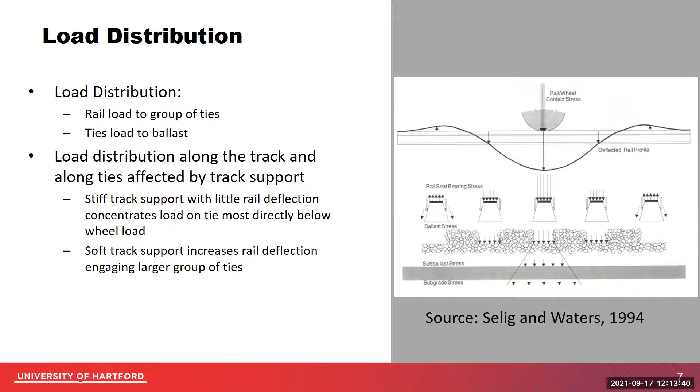Talking a little bit about how those stresses get distributed - the load distribution of the track is shown in these figures here, where we compare wood and concrete ties to each other to show how load is distributed. How the load is distributed, depending on track conditions and model parameters and such, can vary greatly.

In this comparison with a track that has an 18-inch thick ballast, 60 KSI ballast modulus, and a relatively stiff subgrade at 8 KSI, the load on the central tie is reduced with a concrete tie, and the pressure is almost the same on the subgrade. So we can look at the bulb on the bottom - we can see that 10 PSI stress contour applying to the subgrade, regardless of the surface interactions near the ballast and at the rail-tie interface, the load gets distributed down through the ballast into the subgrade at nearly the same level.

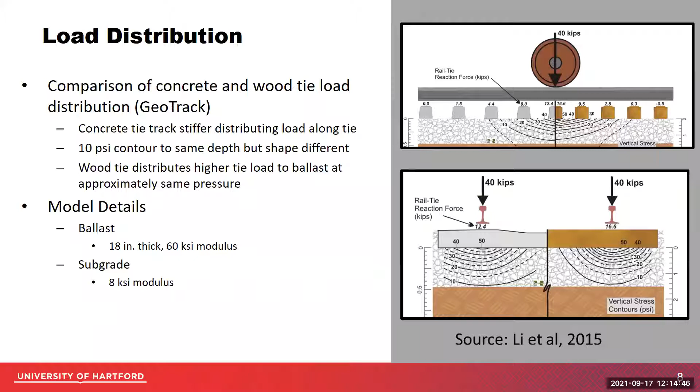The track design philosophy basically is to develop a track cross-section of ballast, subballast, and subgrade to distribute applied loads to the subgrade at an acceptable level, protect the layer below, and provide resilient support to the tie.

Protecting the layer below means that the ballast should reduce the stress in the ballast to an acceptable level for the subballast. The subballast reduces the stress to an acceptable level for the subgrade while maintaining their position and not intermixing, pumping, or otherwise deforming. That last component is known as limiting plastic deformation and settlement.

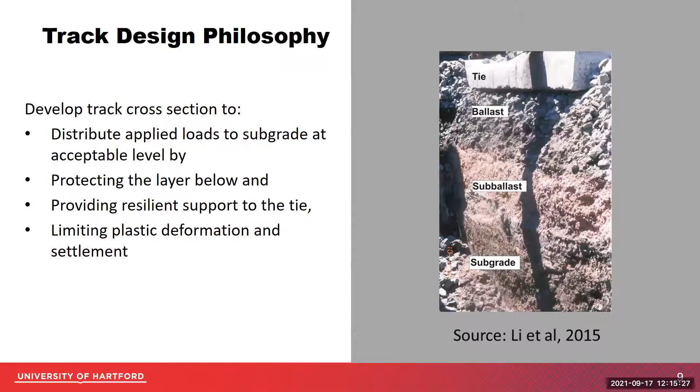The two ballast design criteria we're going to talk about in the design method today are excessive plastic strain at the subgrade surface, that's the subgrade squeeze in the top figure, and excessive plastic deformation, ballast pockets in the bottom figure.

These two subgrade failure modes were the two most common and became a topic for me as an undergraduate at the University of Massachusetts, where I had a chance to work with Dingqing Li in the development of this method and model, and in GeoTrack the stresses that occur near the onset of these two failures, and develop the design charts that we'll talk about in just a few minutes.

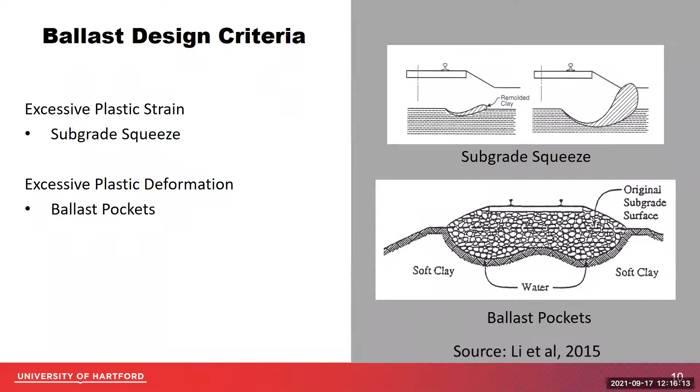The design method itself handles a trade-off between the ballast thickness required for certain subgrade properties at a site or cross section, including trade-offs on track life, number of cycles, and design wheel load.

The design considers the allowable subgrade deformation, and here is really a big jump, that subgrade deforms. In good track, we should have a resilient subgrade that doesn't deform, but the reality is in very soft subgrade conditions, deformation is sometimes inevitable with any load, and the design method in those particularly soft subgrade conditions requires a specification of an allowable amount of deformation that is chosen by the designer.

The subgrade soil type, subgrade and ballast modulus or stiffness, subgrade strength, and other numbers in the chart are the thickness, subgrade thickness, and a design constant of 6 inches for L. So our T over L there gives us thickness increments in 6 inches.

The equation for this design method is given here at the top. The other parameters besides the allowable deformation, the design wheel load, the subgrade strength, and number of load cycles, are these parameters A, B, and M, which are soil type parameters that describe the behavior of the soil. And there's a factor of 1,000 square inches to keep the units in check.

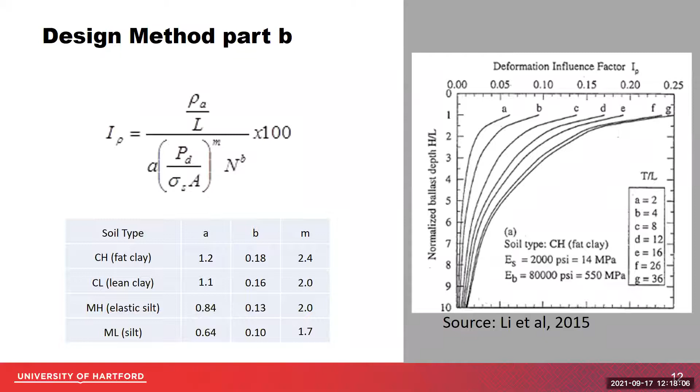Moving on to the risks affecting the track substructure. Maybe not the most problematic, but certainly one of the first ones that'll come to mind is overload.

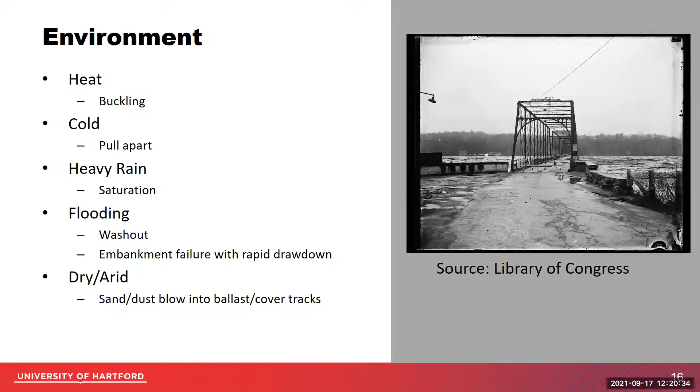Environment's another risk. Going to sound a little bit like a farmer here, but we have risks related to heat in terms of track buckling, cold in terms of pull aparts, rain in terms of saturation, flooding in terms of washouts and embankment problems, and dry arid conditions with sand and dust blowing into the tracks. So operating a railroad has a risk for every type of condition.

I'm going to call out drainage just for a minute, because when I watched the Hay lecture by Gary Wolf, this really struck a chord. One of his top 12 methods for reducing accidents is improving drainage.

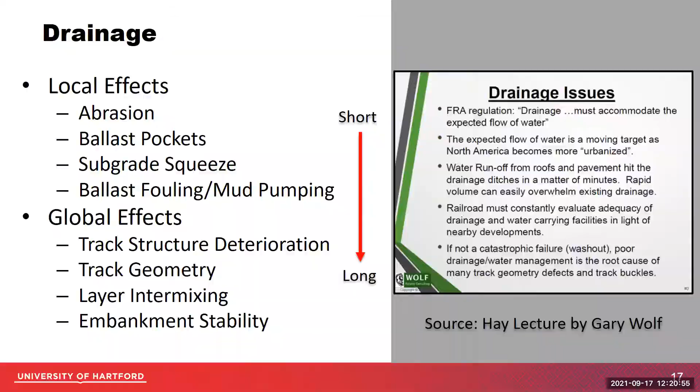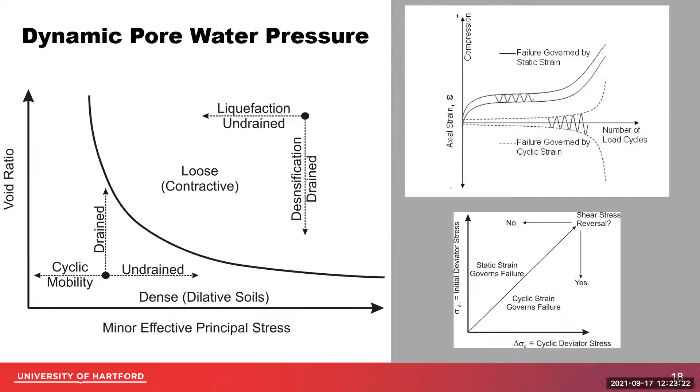When does shear stress reversal occur? It occurs under principal stress rotation. Each time a wheel passes, the stress state in the supporting layers changes, and the shear stress reversal shown in column B reverses each pass, on an incremental basis.

We have to make sure that the roadbed is installed in a condition that the static stresses in the roadbed are adequate to overcome these incremental shear stress changes, such that the overall shear stress does not reverse direction. If it does, you have problems related to dynamic pore water pressure development, since this is a major factor in how fast that develops, and this will certainly affect track life predictions.

So what are the changing environments? I think the first one is environmental changes. We're in an era where we have flooding that occurs a little more routinely than we're used to. And maybe what we're used to might not be whatever is, quote, normal. But if we think back to the floods of the 30s and the 50s, at least in my area in the Northeast United States, it's not flooding that hasn't been seen before, but it's occurring much more frequently. So severe precipitation presents local risks.

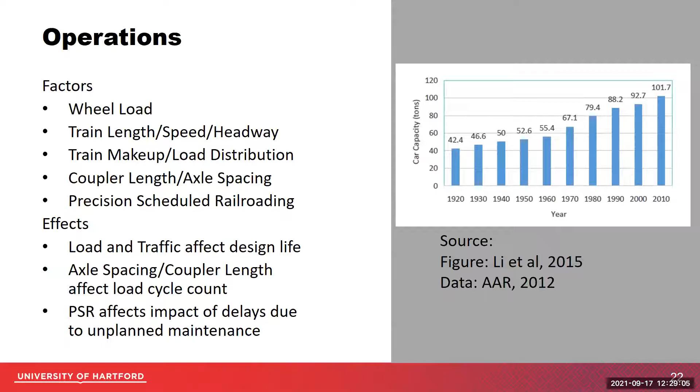In the future, we might have some benefit from the Internet of Things, although I have my doubts about the battery life and sensor life of a lot of these sensors relative to track life. We have some track out there that exceeds the life of most sensors that would be considered an Internet of Things type of device by multiple times.

And coupling with that, fourth industrial revolution, railroading 4.0, having better detection, monitoring, and knowledge of the lifespan of the track and its components would be helpful. But again, going back to the Internet of Things challenges, it presents some issues. And there are other options. Having a sensor isn't the only way to understand the condition. There are remote sensing techniques and other methodologies out there to empower and inform railroading 4.0.

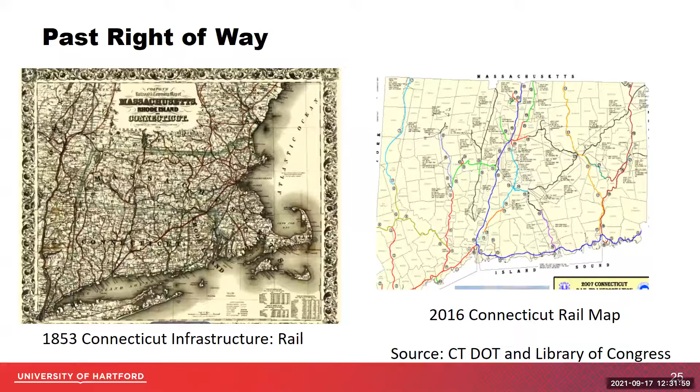So what's going to be the future of the right of way? In the 1850s we had canals, trains, and trolleys. Are we going to zoom from that to the Hyperloop? I don't know. In the 1950s we had trains and automobiles and trucks. And in 2050, a lot of people are saying it's going to be driverless autos and Hyperloop. I'm not sure how that is going to help us as a railroad develop a future. But if we look at trains in the 1850s and 1950s, I have a hard time thinking that trains won't be there in the 2050s.

And maybe our vision for future right-of-way is that ideal track structure: predictable rail freight transit, predictable degradation rates, ideal track. So with that, moving to opportunities to apply the design philosophy to create that ideal track.

Number one opportunity is to address risks. These risks include hazards that are natural or environmental, related to drainage, erosion, floodplain performance, local geohazards, subgrade, ballast performance, and global geohazards like slope instabilities and landslides.

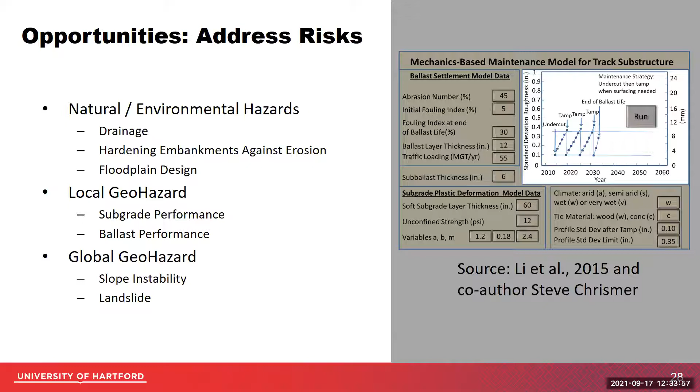So a common question we get asked is, how much more damage will some operation have over some other operation, whether it's a maintenance operation or a change in operating conditions, or flood saturating subgrade—how much more damage will be done? And usually when we get into these types of things, the answer comes from some ratio of load increase to the fourth power. And that doesn't really have any local knowledge, doesn't have any specifics about traffic, wheel load, or track maintenance to inform it.

Applying these design scenarios not only during the design stage to set a design life, but also if we have to go back in for maintenance, to set an expectation of the performance of the track after maintenance, would be a big benefit to try to reduce the slope of that cost curve.

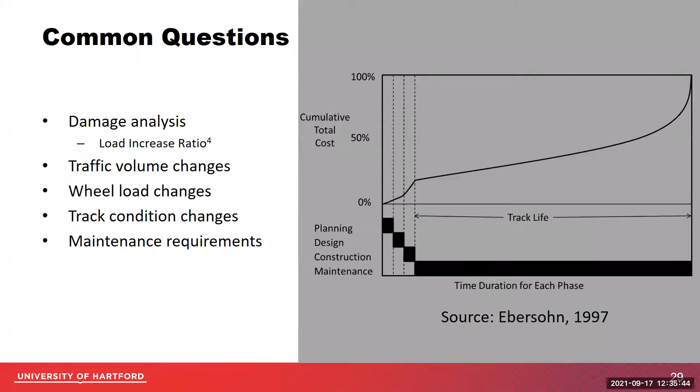Thinking about that, our roadbed design method provides ballast requirements for subgrade condition based on traffic volume and design load. That's great, we can design the ballast thickness. But if we want to convert that design into a design life and a degradation forecast that serves as a basis for design validation, we could be asking much better questions about the performance of our track.

So if we design that upper track and it starts to form this pocket that traps water, does the track deteriorate faster than design? It's deteriorating - if you don't have the degradation forecast, then it's always deteriorating faster than you'd like, because there's only so much time we have to fix things. But is it deteriorating faster than we thought when we made the design? That's a key question.

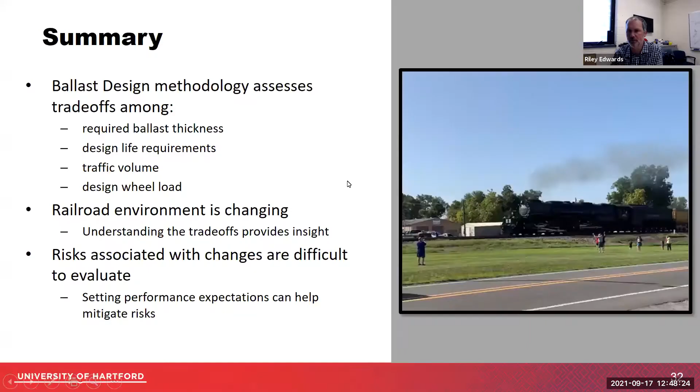Thanks, Ted. We have a couple of questions that relate to using the methodology in more extreme environments. I think I saw a question earlier about permafrost locations, and I see a question here from Mohammed related to peat subgrades. Can you comment on the use of the methodology you presented in unique applications such as those?

So permafrost, that's sort of beyond where I feel comfortable with my experience commenting on. The closest I've come to permafrost has been in southern Alaska, and that was really cold. But in those locations, the permafrost was not permanent anymore, so that was part of the problem. That's a tough one. If you want to design ballast for permafrost, again, it's evaluating the stability of the permafrost. It comes down to those basics: how stiff, how strong, and then limiting those parameters. But you have specific failure modes in permafrost that you should consider. So I defer on the rest of that answer to somebody else who knows more about permafrost.

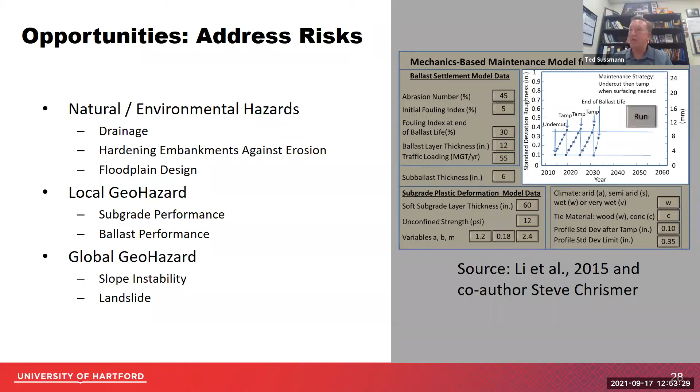It is what it is, we have to deal with it. Yes, the track has been overloaded and the subgrade wasn't designed right, and there are options to reinforce it. But again, it comes down to site specific solutions - seek specialist help. When you have the bathtub effects, it's more like that figure I showed with the surface profiling data and the GPR data, to find the depth of the ballast pocket.

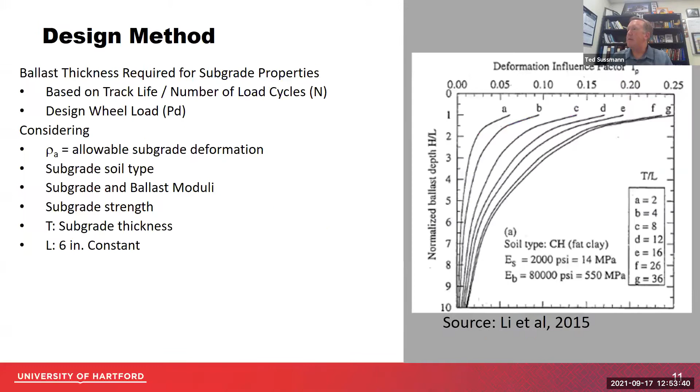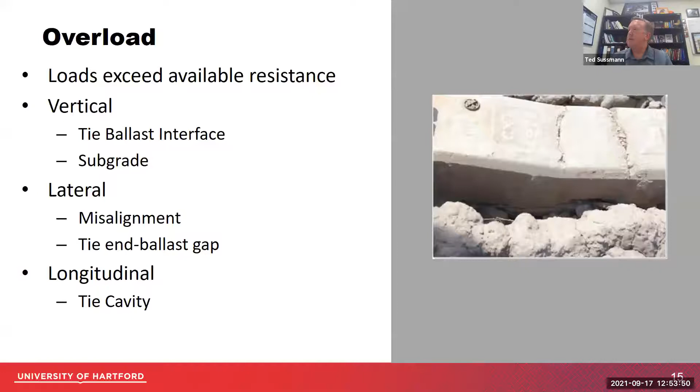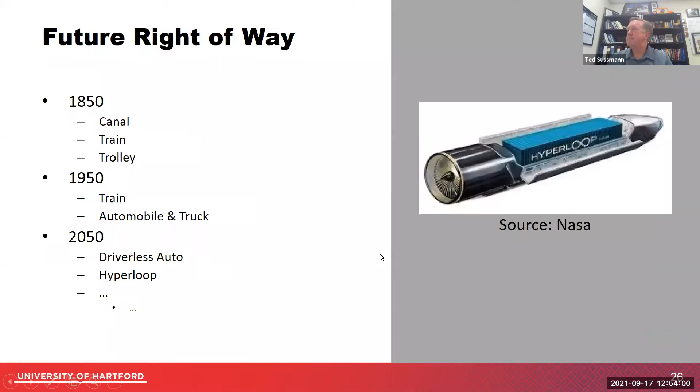I'm going to scroll right up here until we find it - that little figure from Jim Hyslip. This is a great figure, if I can find it... hopefully I don't go past it. I went past it. I'm trying to go slow now. Well, sorry about that, I'm going to locate it in the application and put it up in just a second.

But mapping, whether it's LiDAR or whatever, getting the surface profile and identifying the ditch invert, and then designing the drainage to intercept that ditch invert and drain the ballast pockets - that whole system. There are nice data sets that inform and help with that too. Can you see my screen again, Riley? Now that I reshared - we can, Ted. Thank you. So this type of pocket, or maybe something even worse, understanding the topography from something like a fly map, understanding the interface from GPR, and then coming in here and reinforcing and providing the drainage and everything.

There's good solutions to this, but it's hard to picture an out-of-face operation that would let you do a lot of miles of that on a quick basis. So I guess that's probably the heart of the question - I have no easy answers for that one. I know there are good methodologies that get applied over long distances pretty quickly, but it comes down to addressing these site-specific issues, because geology is local, right? If there's a weak area that shows up under a track, whether it's a peat location or not, it's probably an anomaly and not a systematic problem affecting the entire geology, so you just have to address it there.

At least that's how I like to think about it. We have many track miles that perform well - it's not like all the track miles have substructure problems. Probably less than 10% of them have substructure problems, but the ones that do need specialist attention with site-specific answers and solutions. That's a helpful response.